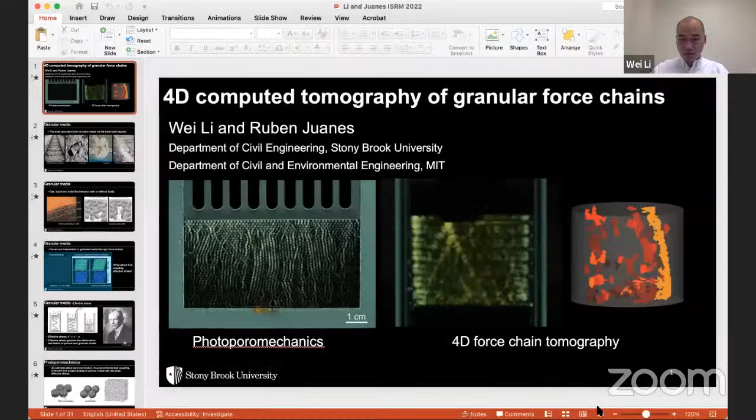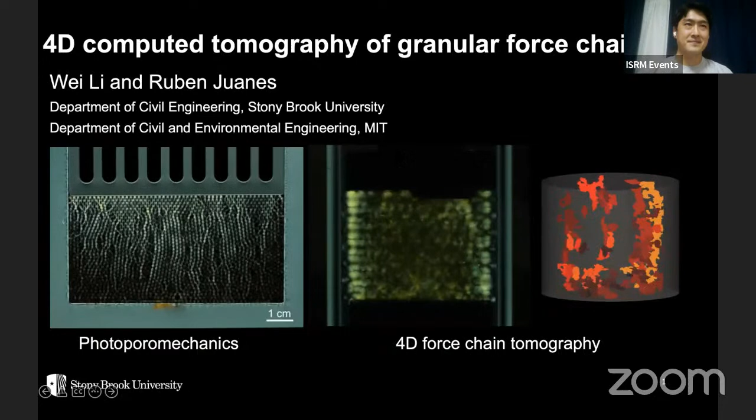Thank you. All right everyone, can you see my screen? Yes, I can see. Okay great, let's get started. Thank you, Ryota, for your kind introduction. Hello everyone, my name is Wei. I'm currently an assistant professor in the Department of Civil Engineering at Stony Brook University.

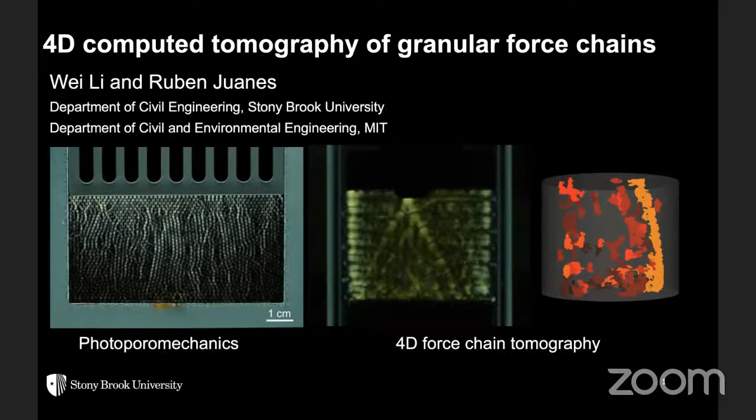In today's seminar I will present a new type of tomography called 4D computed tomography of granular force chains. This work is done in collaboration with Professor Ruben Juanes in the Department of Civil and Environmental Engineering at MIT. I will first introduce a new method called photoporomechanics that visualizes effective stress. This is a two-dimensional experimental method, and I will move on from 2D to 4D to visualize force chain evolution in three-dimensional granular media.

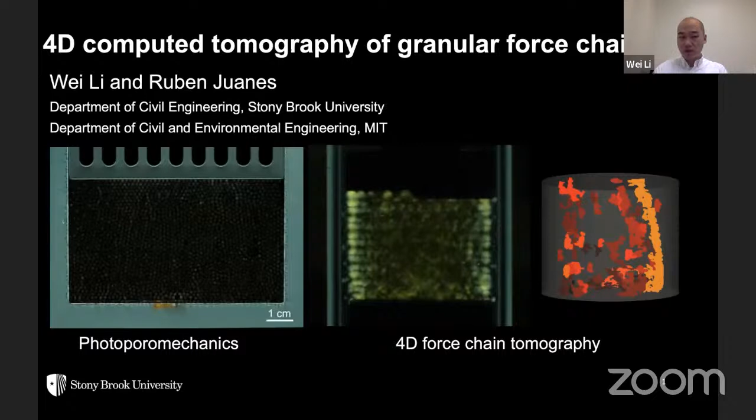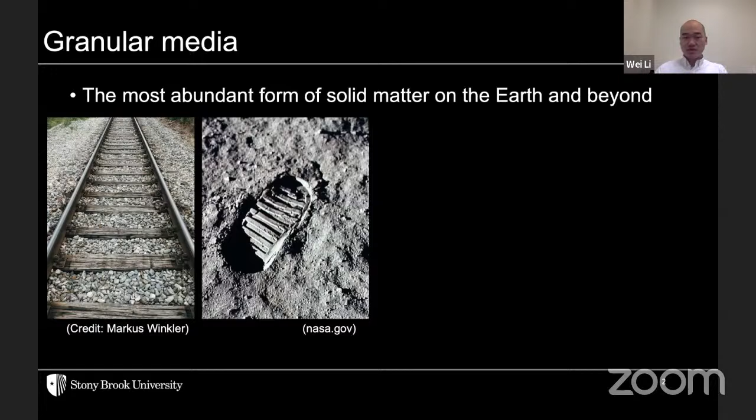So why do we study granular media? Granular media is the most abundant form of solid matter on Earth and beyond Earth. It supports our infrastructure, shown on the railway track, and it supports our space explorations, such as the first step on the moon. However, the failure of granular media could lead to devastating consequences, such as landslides and earthquakes.

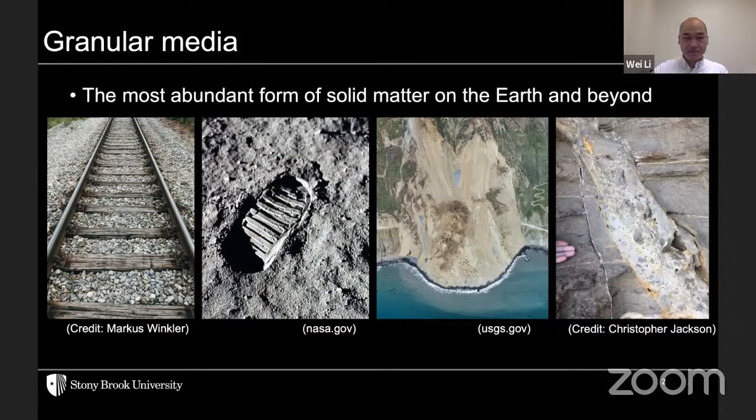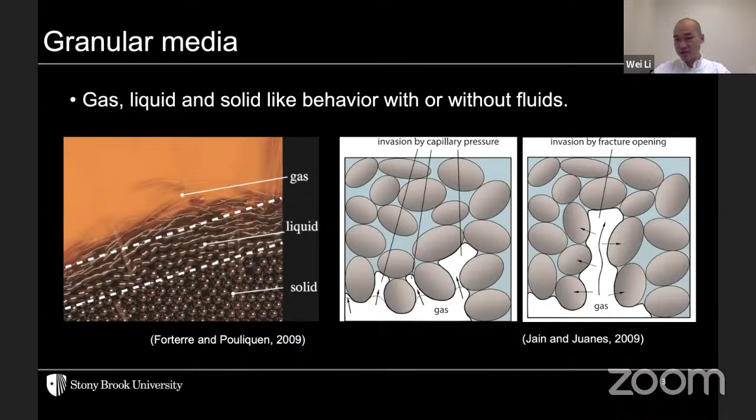The behavior of granular media is very complex. It could exhibit gas, liquid, and solid-like behavior when dry, and coupling with fluid, it will exhibit even more complex behavior, such as gas invasion and gas fracturing.

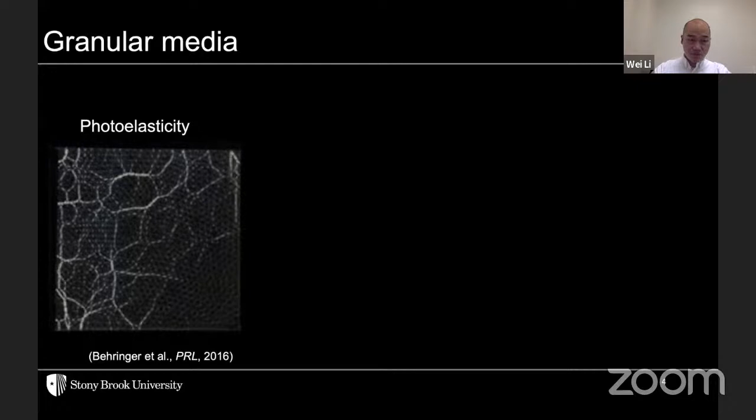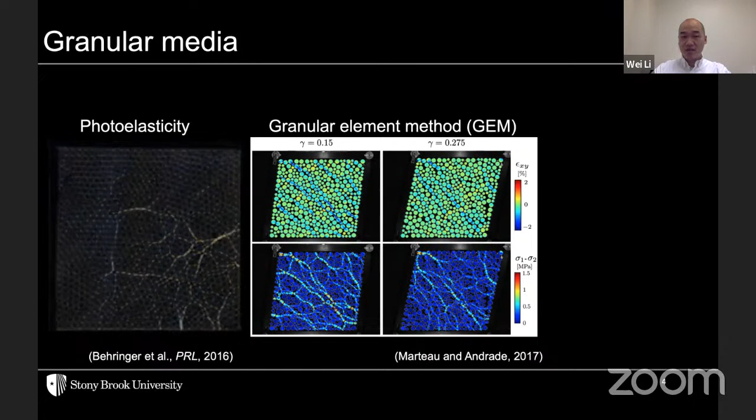Another type of study was done by Professor Jose Andrade's group at Caltech. They use particle tracking and DIC to visualize the deformation on each of these particles, and from the deformation they can calculate the interparticle forces. Their findings are similar: the forces are transmitted in granular media through force chains.

Well, powerful as this method can be, what about fluid coupling? More importantly, what about effective stress that governs the behavior of granular media when they are coupled with fluids? Can we simply put these methods underwater and visualize effective stress?

The answer is no, because effective stress is a very important concept that was introduced about a century ago by the father of soil mechanics, Karl Terzaghi. The concept is relatively simple. If you apply a certain load on soil, the soil will not deform immediately. But if you allow the pore fluid to drain, the pore pressure to dissipate, the soil will further deform.

From Terzaghi's point of view, effective stress is the total stress minus the pore pressure, because the pore pressure is supporting part of the load, right? And the effective stress governs the deformation and failure of porous media and granular media.

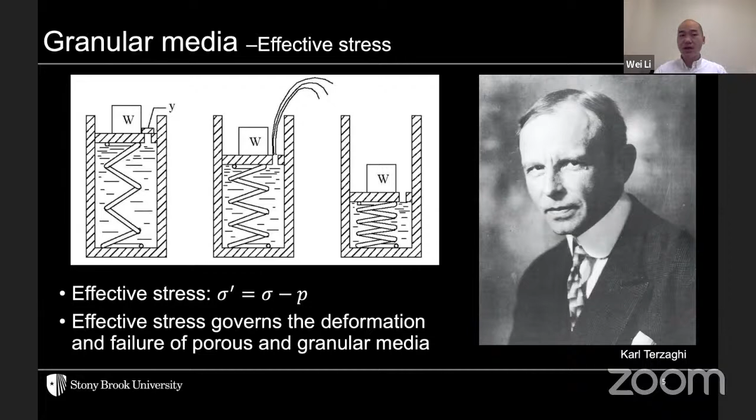Important as this concept is in the field of civil engineering and geomechanics, effective stress has never been directly visualized or measured. And this is what our new technique does. We call this new technique photoporomechanics.

The previous method, as I discussed, used disks. The pores among these disks are not connected, so they are not forming a proper analog of a porous media or granular media. So we have to use three-dimensional particles. These particles will allow pore connection and thus poromechanical coupling. Only with this proper analog can we study effective stress.

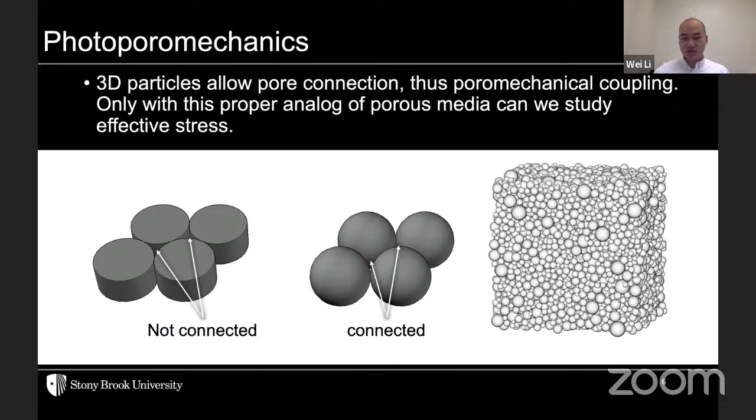So that's what we did. We make these photoelastic spheres and angular particles that are three-dimensional. So when we pack them, they will have pore connection. This angular particle we fabricated is called icosahedral. It's a three-dimensional shape that has more angularity for interparticle locking.

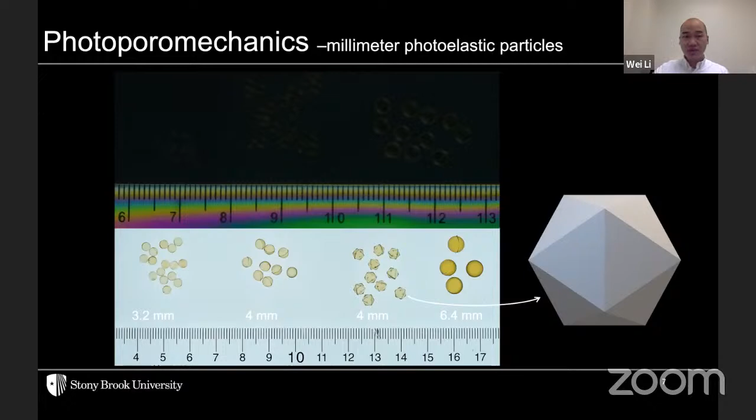These particles are photoelastic, and at the same time, they are residual stress-free. What is residual stress? If you remember what the ruler looks like under white light, this is what it looks like under cross-polarized light. You can see the color fringes. We don't want that. We want our particles to only show up color and brightness change when they are under stress. And we did that, because now you can barely see these particles.

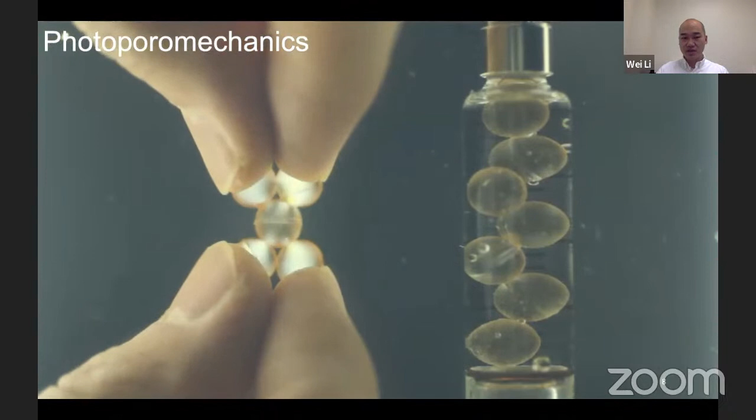Here is how the particles behave. This is my hand squeezing these particles. They light up when you squeeze. And if you squeeze them really hard, you can see the color fringes. These particles are also chemically compatible with many fluids such as oil, water, glycerol, and air. And even when there is multi-phase flow interfaces, it does not affect their behavior.

Besides playing with these particles, we conducted calibration tests. We load these particles in steps and record their reaction forces and the brightness change on these particles. After we associate this brightness with the forces on them, we can quantitatively analyze the local stresses on these particles.

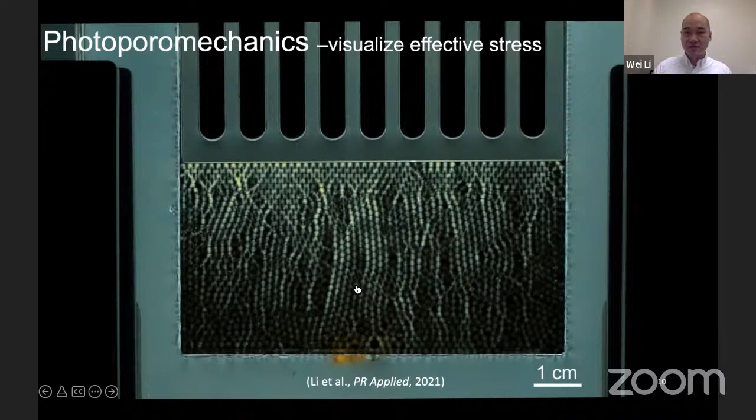So qualitatively, you can already see that this is consistent with the 1D consolidation theory. Now, here is a more quantitative study.

We take six snapshots during the experiment. We average the light intensity horizontally, so we have a vertical profile of the light intensity. If the light intensity is indeed indicating the effective stress, we should have a good match with the 1D consolidation model, which is shown in the dashed line. And here you can see that the experimental results match the model pretty well. So now we can confidently say that we are able to visualize and measure the effective stress for the first time in porous media.

Now, we immediately apply this method in the study of gas invasion in fluid-saturated granular media. When the particles are fully saturated, they could behave like a solid or a fluid. When they behave like a solid, the fluid has to permeate through the pores.

But when they behave like a fluid, they can just flow together with the pore fluid. So it is really hard to tell from traditional methods, but now with photoporomechanics, we can easily tell, right?

This is an experiment when we inject air into a fully saturated pack of photoelastic particles. As you can see at the tip of this fracture, the granular media behaves more like a solid where you can see effective stress. Behind the tip of the fracture, it behaves like a fluid where there's no effective stress.

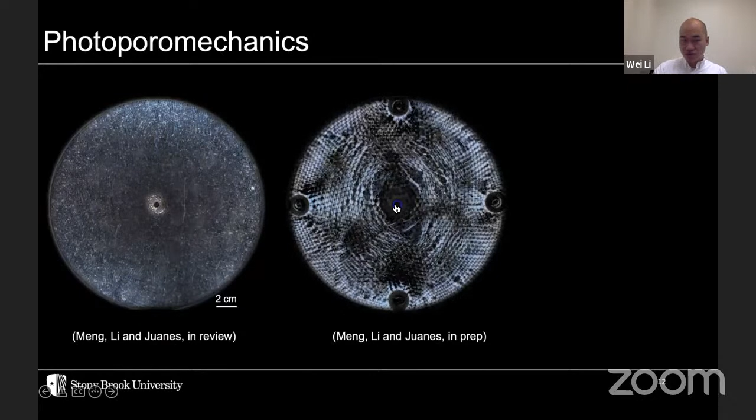You can see these force chains that are circular around the injection port, indicating that there is negative stress. Negative stress meaning tensile stress. So now I have presented a new technique that can help us visualize effective stress.

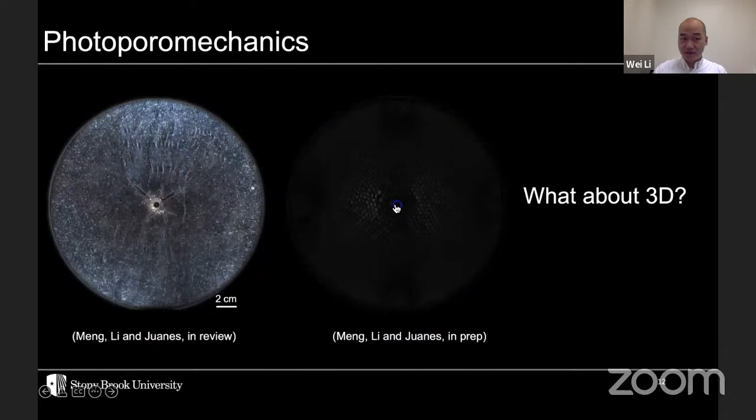But how about three-dimensional granular media? Well, there have been several studies. What they do is they use either index matching tomography or X-ray CT to reconstruct the deformation on each of these particles.

And then based on this deformation, they use force balance, contact models, and constitutive models altogether to calculate the interparticle force chains like this. This is how forces are transmitted through three-dimensional granular media.

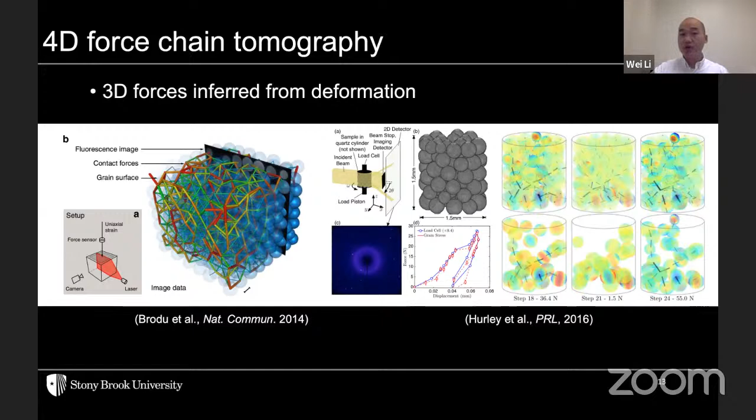Now we want to come up with a new method that does not need to assume a contact model, and it can handle particles with more angularity.

So we learned from tomography that we should use a penetrating wave to generate a 2D projection of a 3D object. For example, this is a first X-ray of a hand. And then when we rotate the object while we generate these 2D projections, we can reconstruct the three-dimensional model based on these 2D projections.

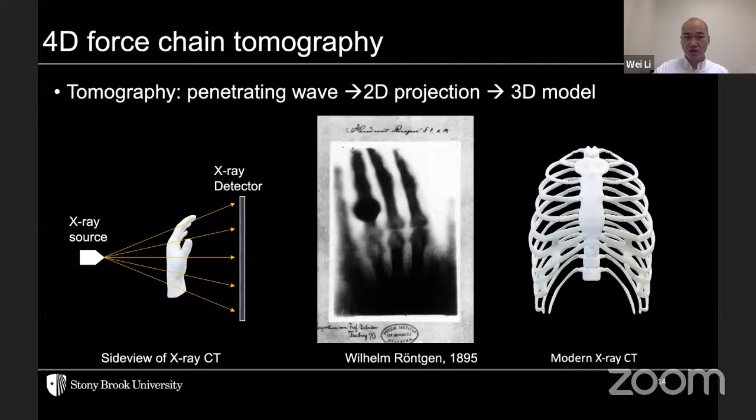So this is what we did with our new type of tomography. We want to integrate photoelasticity with tomography. However, one big obstacle is that these particles at the same time are lenses that cause refraction of the white light. We don't want that refraction, right? We want the white light to be the penetrating wave.

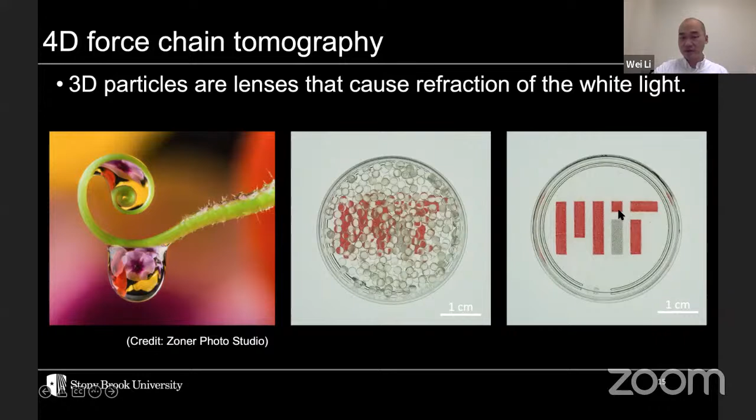So what we did is we made an index matching fluid for these particles. Now when we saturate these particles with this index matching fluid, you can see they no longer refract the light because it got canceled out. So now we can use white light as the penetrating wave.

Here is a schematic of the setup. White light generates through this light panel, and it penetrates through this index matching fluid tank and this three-dimensional pack of particles. And then we can generate these 2D projections.

And here is how the setup looks like. This is a setup to apply normal stress and rotary shear onto the three-dimensional pack of photoelastic particles. This is the index matching fluid tank. This is the rotation stage that rotates the pack.

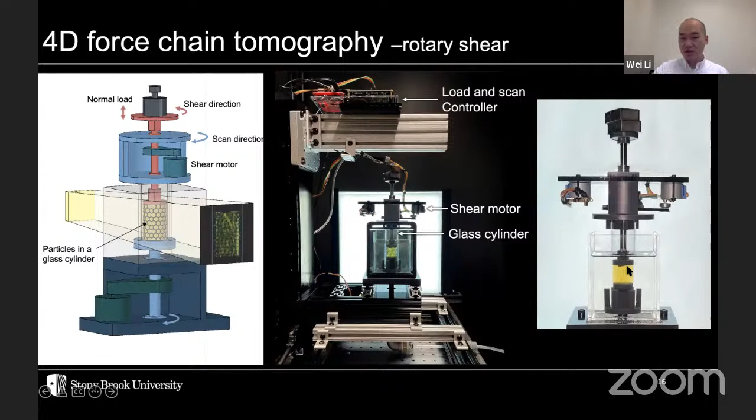And here is how it looks like under cross-polarized light. You can already see some filamentary patterns using this technique. Here's a close-up of the loading device that applies normal stress and shear stress onto the pack of photoelastic particles.

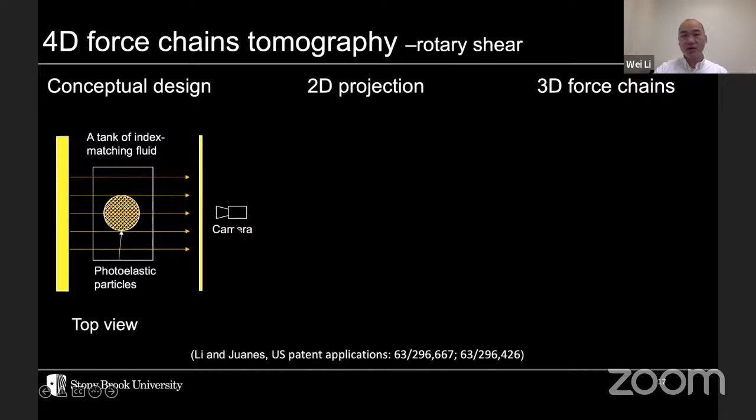And again, here's a conceptual design. White light penetrates through this index matching fluid tank and the three-dimensional pack and gets recorded by the camera. So here is the 2D projection, and this is a 360-degree rotation of the 2D projection.

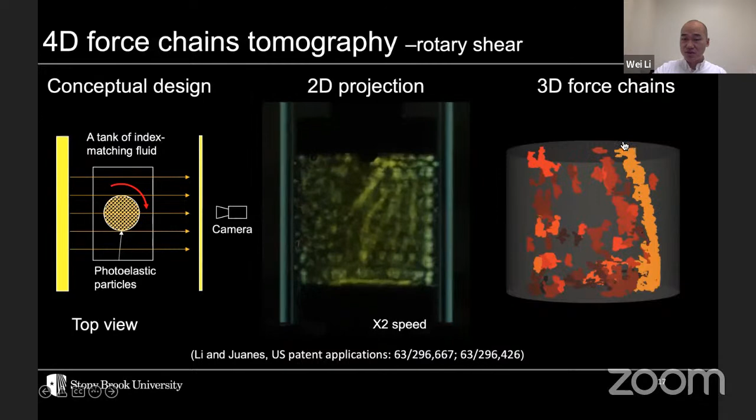As it rotates, we take pictures. In this 360 rotation, we take about 2,000 images to reconstruct the three-dimensional force network. Here is how it looks like, and this is the first time we see helical-shaped force chains in granular media.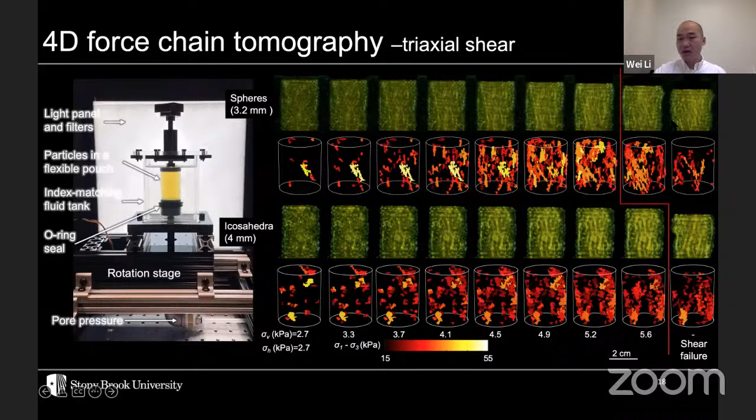Obviously, particles with more angularity fail later than particles with less angularity, such as spherical particles.

We also did a quantitative study trying to see how these particles relate in orientation, length, and stress. This is a two-dimensional histogram of their length, stress, and dip. The dip, with 90 degrees meaning vertical, and the bottom axes show length and stress.

As you can see, when we increase the vertical stress, we see more and more force chains with a 90-degree dip, meaning they are vertical. We also see more vertical and long force chains form as we increase the vertical stress. Right before failure, the force chains start to shift from vertical to other degrees, meaning they are buckling.

And after they fail, the force chain starts to disappear.

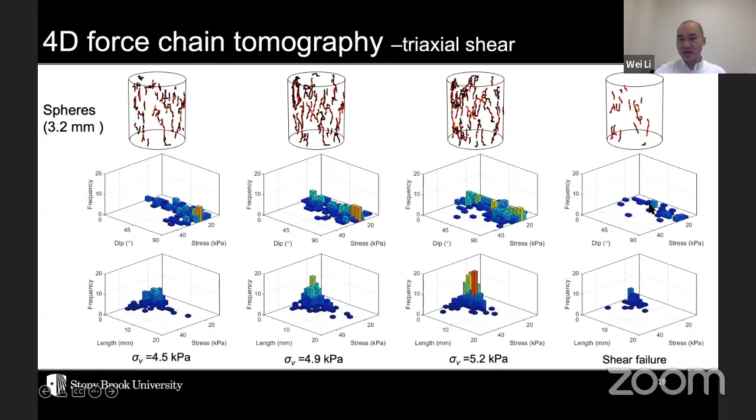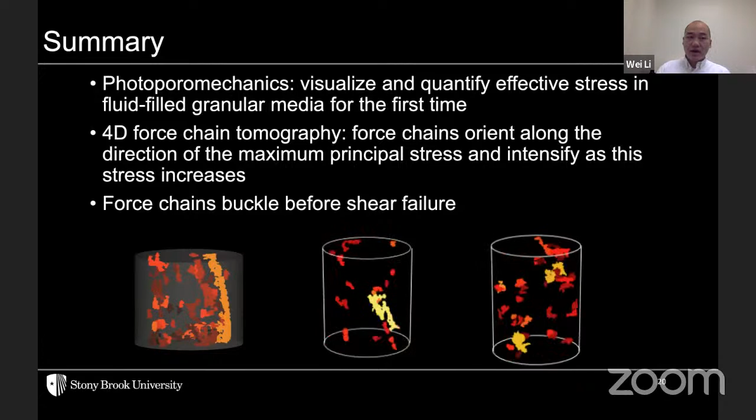So with this technology, I would like to summarize our study here. We developed a new technique called photoporomechanics to visualize and quantify effective stress in fluid-filled granular media. We developed this 4D force chain tomography and found that force chains orient along the direction of the maximum principal stress and intensify as stress increases. The force chains will buckle before shear failure.

I would like to stop here, and here is a reference for our previous study on photoporomechanics. This study was sponsored by NSF, and we are grateful for their support.

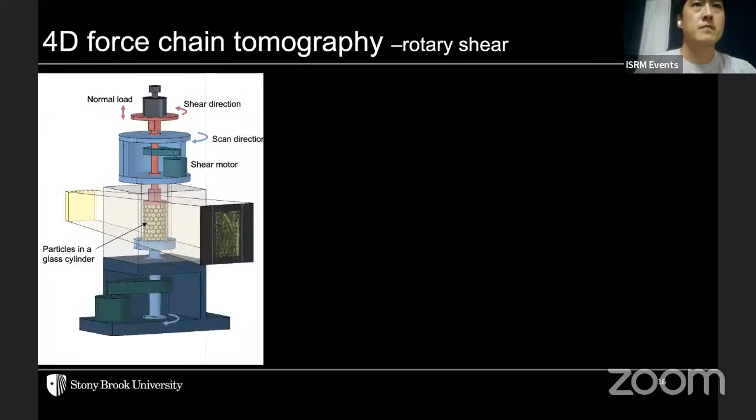Okay, can I ask a question? Would you show slide 11? Okay, slide 11. Yeah, yeah.

I couldn't catch how you convert, how you get the effective stress value from...

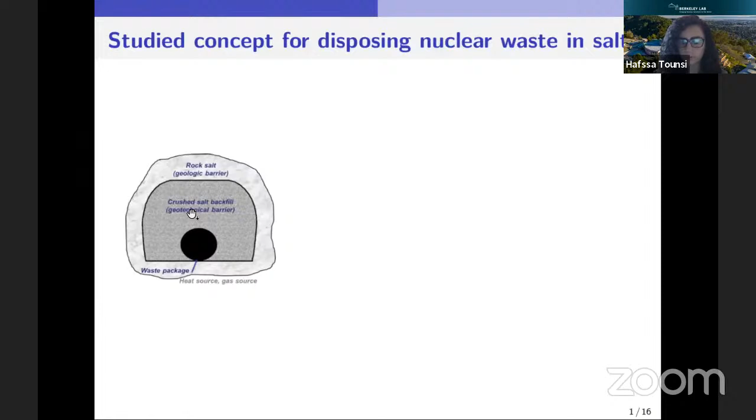We have identified several thermal, hydraulic, and mechanical processes associated with this disposal scenario. Among them, in the short term, we have the development of a damaged zone around the newly excavated drifts, the compaction of the backfill, the healing of microfractures in the damaged areas, and finally the increase of temperature in the repository and the resulting pore pressure buildup.

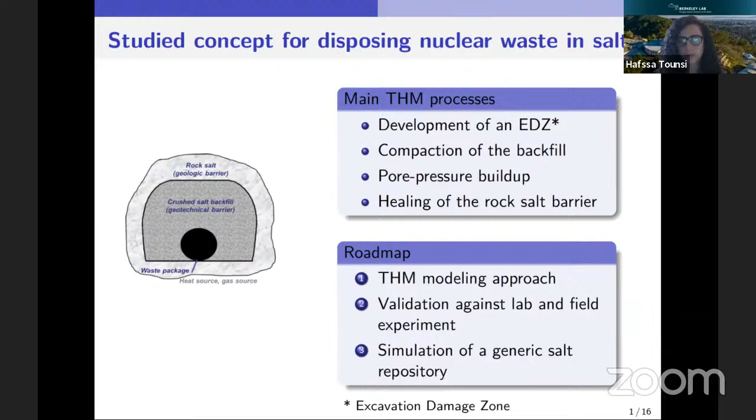To investigate these processes and their impacts in the short and long term on the integrity of the geotechnical and geological barriers, we use a macroscopic numerical modeling approach, which I will briefly present. This approach has been validated against different lab and field experiments in order to use it confidently for the simulation or prediction of the behavior of the salt repository for high heat emitting nuclear wastes.

In all the simulations I will present today, the TOUGH-FLAC simulator was used. It links TOUGH, Berkeley Lab's in-house simulator for multi-phase flow and heat transport, with the geomechanical code FLAC3D.

The energy and mass balance equations are first solved in TOUGH, and then the mechanical problem is solved in FLAC3D using the newly computed values of the pressures and saturations of the different phases in the pore space, and temperature.

The mechanical calculation allows us to update the grid because we are in the large deformation framework, in order to accommodate the large deformations of the backfill during reconsolidation.

The grid is updated using the newly computed values of the strain tensor, and the flow parameters are also updated, such as the porosities and permeabilities.

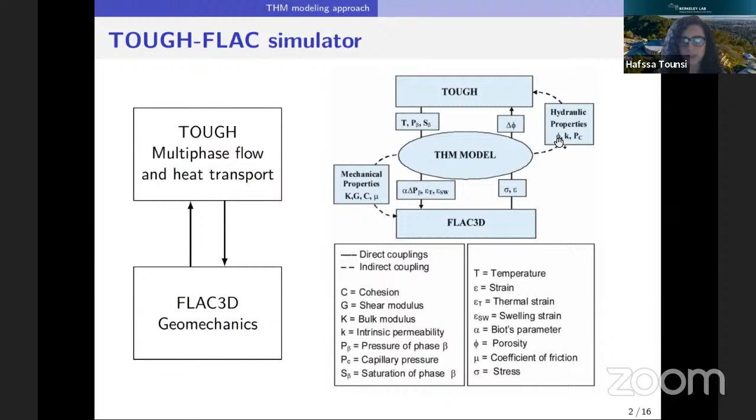To describe the mechanical behavior of rock salt, we use the Lux-Wolters model. It has been developed by our collaborators from Clausthal University of Technology.

In this model, the total strain rate tensor is decomposed into an elastic component, and a viscoplastic component that includes transient and steady state creep, whose evolution laws are a function of deviatoric stress and temperature.

The third component is the shear-induced damage that takes place when the shear or von Mises stress exceeds the shear strength, which is a function of the minimum principal stress and the Lode angle.

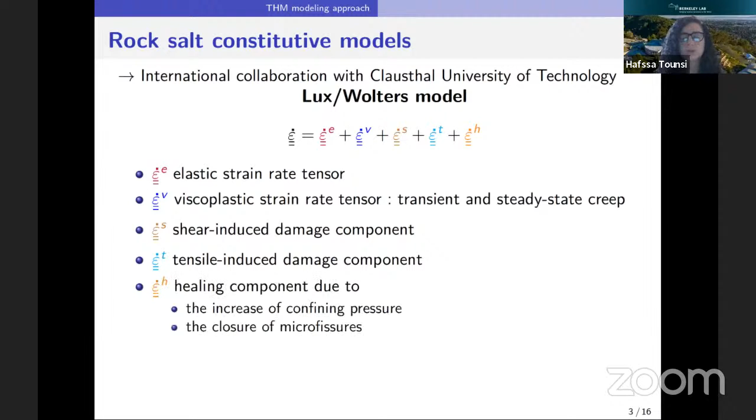The appearance of tensile stresses also leads to additional damage. The last component is healing, due to the increase of confining pressure or the closure of microfissures.

When thermomechanical damage takes place and the volumetric strain exceeds a dilatancy threshold, the preformed microfractures start to coalesce, leading to an increase of permeability.

We take into account this increase of permeability. It is also a function of the effective stress perpendicular to the direction of the microfissure.

Permeability can also increase due to hydraulically induced damage, which happens when the fluid pressure exceeds the minimum principal stress, leading to an infiltration of the saturating fluid along the newly opened grain boundaries.

We also consider the increase of the Biot coefficient with damage, and we use two empirical expressions to describe the variation of the thermal conductivity and heat capacity of rock salt with temperature.

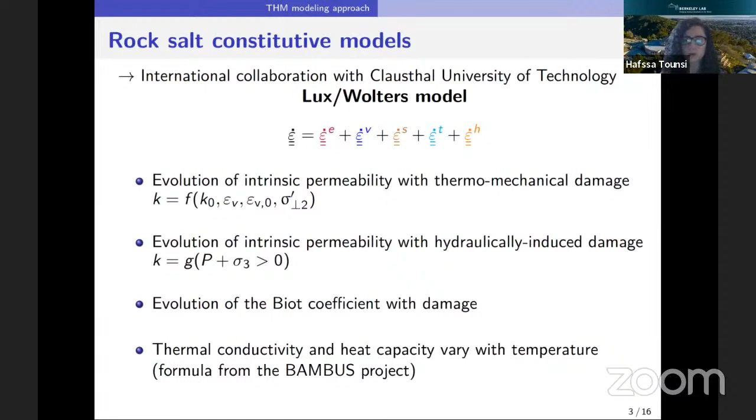For the backfill material, crushed salt, we use a modified version of the CWIPP model. In this version, the total strain rate tensor is decomposed into an elastic component.

The drained elastic moduli now evolve with crushed salt density. So when crushed salt density increases, the bulk modulus increases and the Biot coefficient decreases.

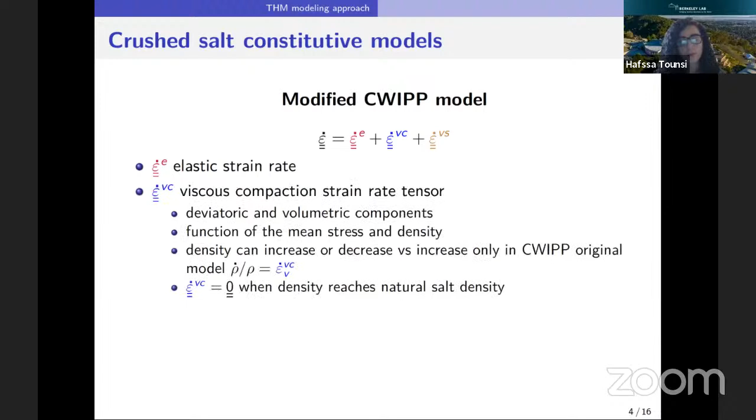We have a second component, the viscous compaction strain rate tensor. It has a deviatoric and a volumetric component, and depends on the mean stress and density. It becomes equal to zero when the density of crushed salt reaches the density of natural salt.

The last component is the viscous one. It is purely deviatoric, depends only on the deviatoric stress and temperature, and does not get cancelled when the backfill is fully reconsolidated.

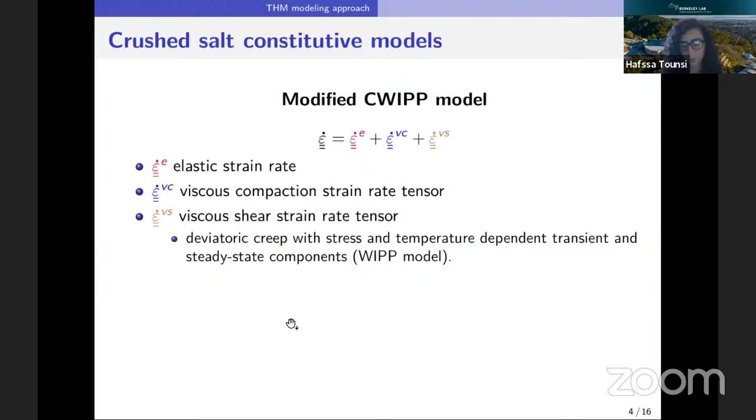It has transient and steady state components, which are expressed in a similar way to the WIPP model, also implemented in FLAC3D.

Permeability and thermal conductivity of crushed salt are assumed to vary with the porosity. So when the porosity of crushed salt decreases, its permeability decreases as well.

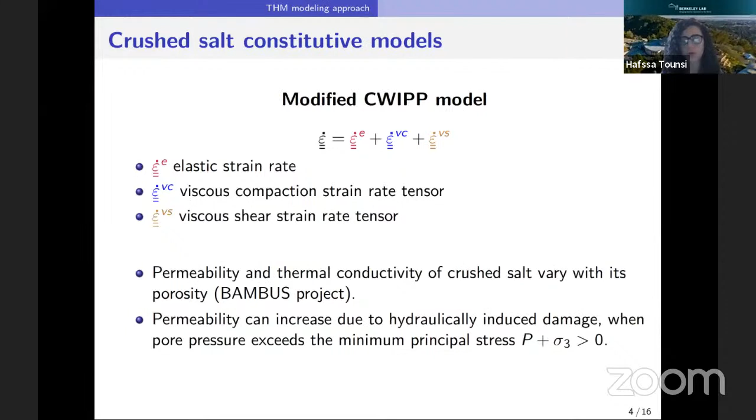But it can increase again in case we have hydraulically induced damage, when pore pressure exceeds the minimum principal stress, like for rock salt.

As I said in the beginning, this model has been validated against different lab and field experiments. Today I have chosen to show the example of an experiment that was conducted in the 1980s by Sandia National Laboratories, but it has never been properly modeled.

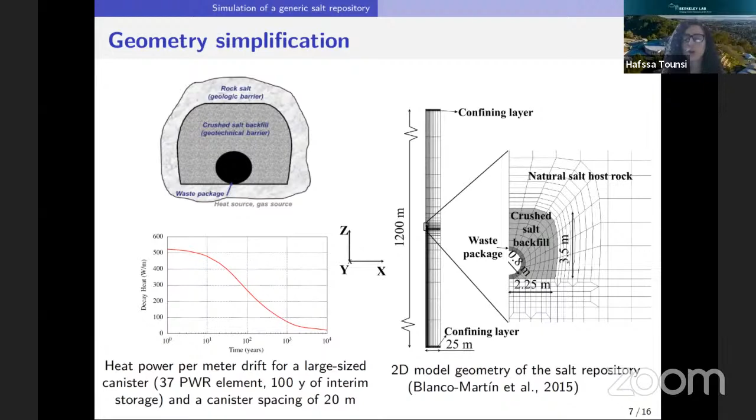So we simulate first the excavation of the drift, the emplacement of the waste package, and the backfilling in order to generate the initial pore pressure and stress fields. In the next slides, I'll present the results for the post-backfilling stage.

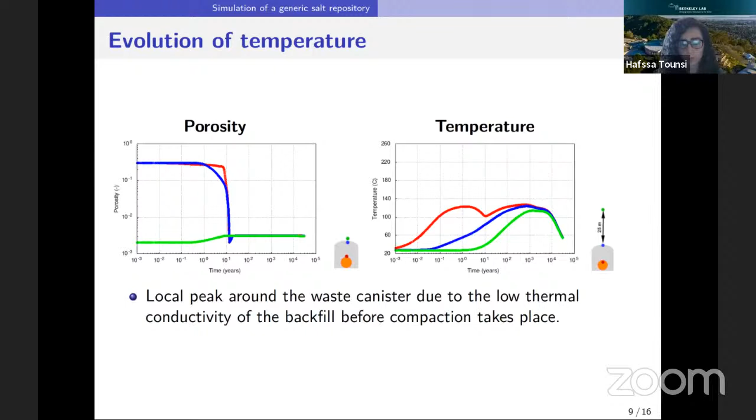As the backfill reconsolidates, the elastic moduli of crushed salt tend toward the elastic parameters of rock salt, and the stress state, which is initially equal to 0 in the drift, increases and becomes equal to the initial undisturbed isotropic stress state in the host rock.

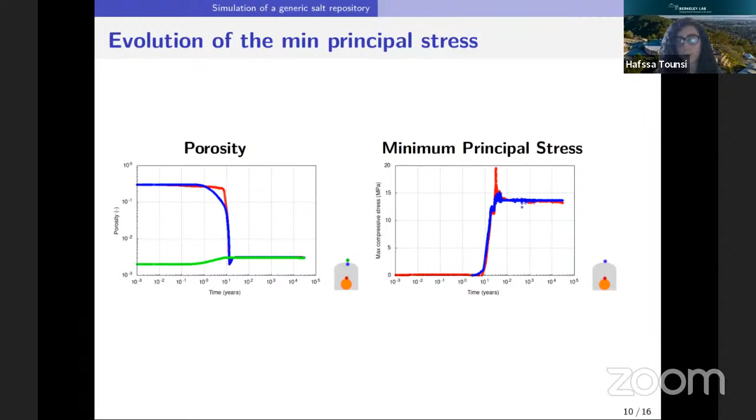Now I'm showing the distribution of shear dilatancy around the drift in order to get an idea about the extent of the excavation damage zone around the drift.

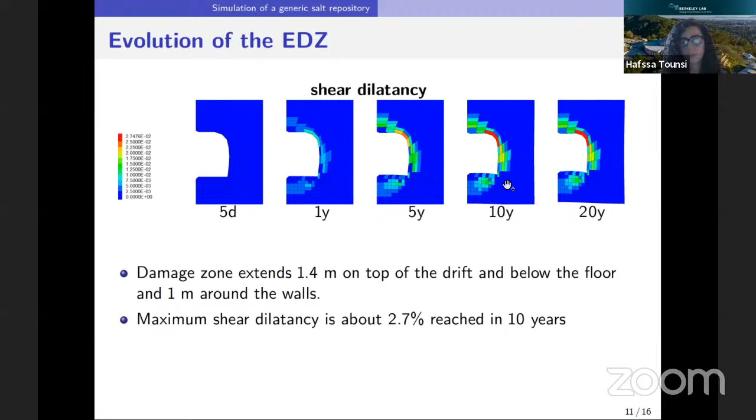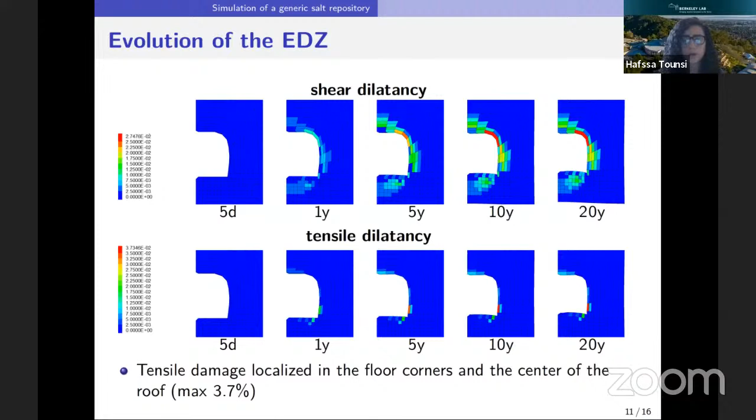As you can see, 10 years after the backfilling of the drift, the shear dilatancy reaches its peak, its maximum values, around 2.7% in the corner. The damage zone extends 1.4 meters on top of the drift and below the floor, and 1 meter around the side walls. We also have some tensile dilatancy, but it's very localized in the floor corners and the center of the roof, probably due to geometrical considerations.

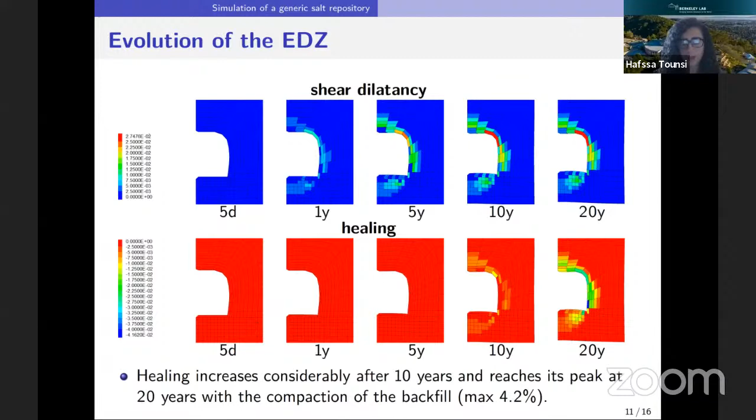Now the distribution of healing. As you can see, at 10 years, the healing becomes significant, which explains why the shear and tensile dilatancy reach their maximum at this date. But 10 years later, the excavation damage zone becomes fully healed, and this quick healing is accelerated by the quick reconsolidation of the drift. So the main outcome from these dilatancy maps is that the creep and dilatancy of natural salts trigger and accelerate the reconsolidation of crushed salt, which in return contributes to the acceleration of host rock healing.

The hydromechanical coupling in the EDZ, or the excavation damage zone, is very strong. Those maps show the evolution of the Biot coefficients in the EDZ. As you can see, at 10 years, when the dilatancy is maximum, the Biot coefficient can even reach the value of 1 in the corners and near the side walls.

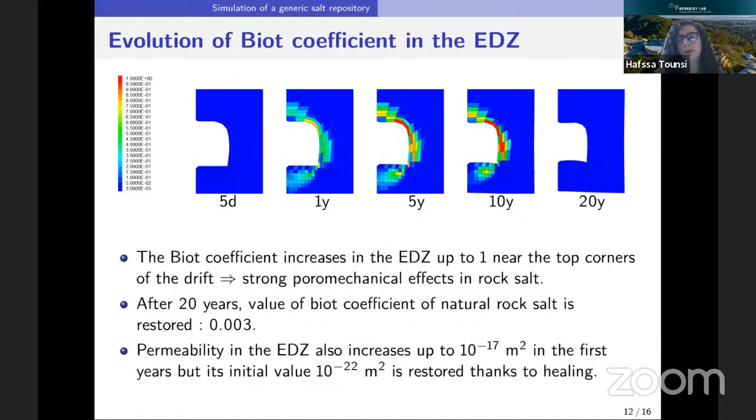But thanks to healing, its initial low value is restored 10 years later. The permeability in the EDZ also increases up to 10 to the power of -17 in the first years, but its initial value is restored as well, thanks to healing.

So as I said in the first slides, the shear and tensile dilatancy are not the only mechanisms responsible for the increase of permeability. We also have the hydraulically induced damage. To investigate this process, let's have a look at the pore pressure and liquid saturation evolution in three locations.

In the host rock, the green point, the pore pressure is initially equal to the hydrostatic pressure, and in the drift it is equal to the atmospheric pressure. Since the host rock is fully saturated, thermal pressurization is significant and starts to increase first due to thermal pressurization. But as the backfill reconsolidates, liquid saturation inside the drift increases, and the thermal pressurization becomes significant there too, so pore pressure increases as well.

In the three locations, the pore pressure exceeds the lithostatic stress level, indicated with the purple line, and this induces an increase of permeability and a decrease of pore pressure until it stabilizes around the lithostatic stress level. And when the temperature starts to go down, the pore pressure starts to go down as well.

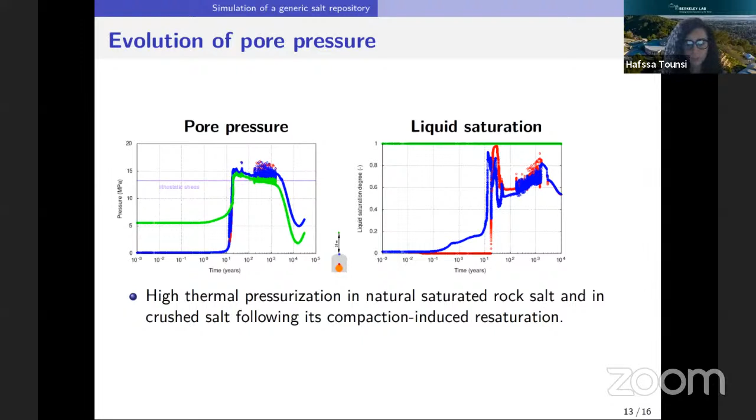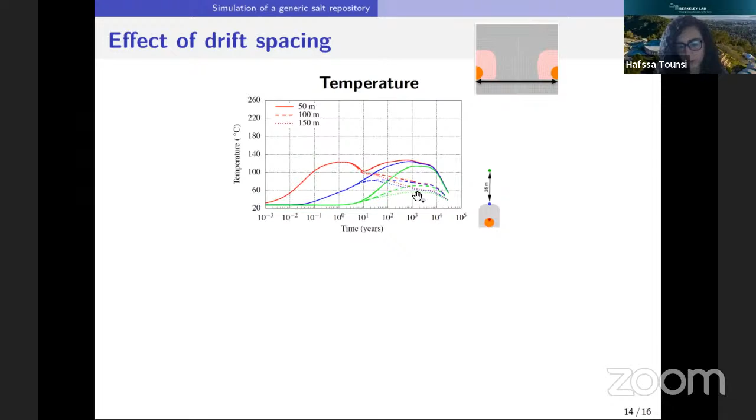In order to investigate whether we can alleviate this strong thermal pressurization in the repository, we conducted another simulation where the spacing between the emplacement drifts has been doubled. This figure shows the old results of temperature and the new ones represented with dashed lines. As you can see, the long-term peak of temperature significantly decreases when the spacing was doubled.

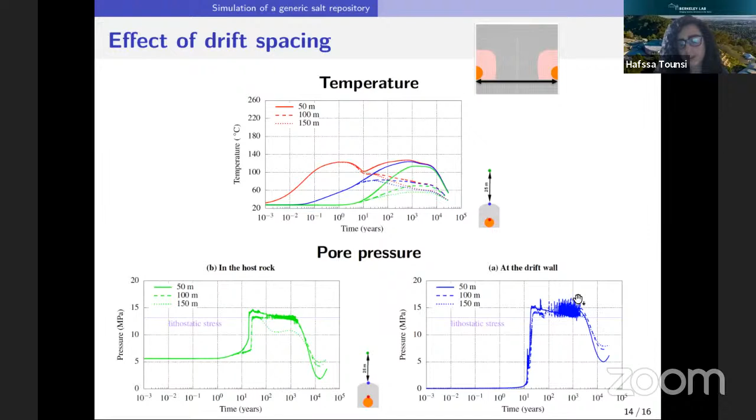But at the drift wall, the pore pressure is still exceeding the lithostatic stress level, even when the spacing was doubled. So to sum up, we've seen that salt repositories behave in a highly THM coupled manner. The simulations have shown that the high temperature changes and quicker consolidation of the backfill induce a strong thermal pressurization that may not be avoided even with a large distance between individual waste packages and emplacement drifts.

However, there are still some uncertainties related to crushed salt compaction rates. There is some recent experimental data on the compaction rate of crushed salt suggesting that this compaction rate will decrease with the decrease of porosity, resulting in a longer or slower reconsolidation of the backfill. Also, the deviatoric stress in the repository in the long term is lower than 1 megapascal, and most creep data available in the literature is conducted in a larger deviatoric stress range.

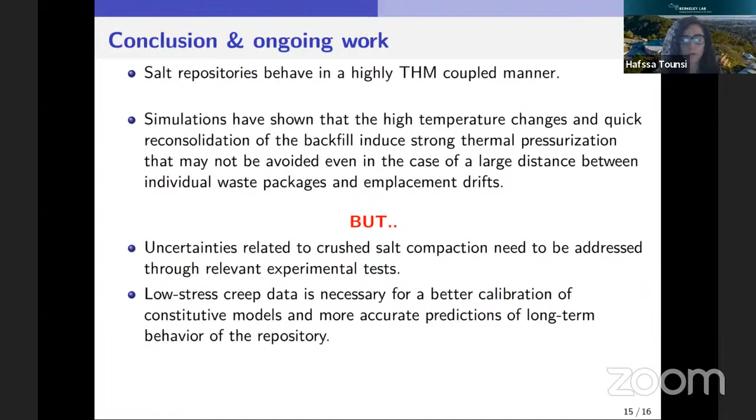So low stress creep data is needed for a better calibration of constitutive models and a more accurate prediction of the long-term behavior of the repository. So that's it. Thanks for your attention, and I would be happy to take your questions.

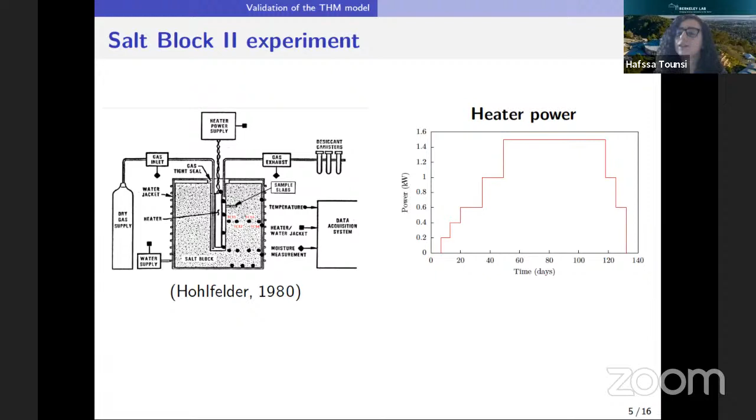Okay. Yeah, it's because for constructing this curve of heater power, this is a schematic curve. We don't have the exact measurements of the heater power with time. It's a very old experiment, so we have events. We know that after 10 days the heater power was increased, but this is a modeling approximation. It's not the real curve showing the exact heater power value with time. We only have dates when the heater power was increased or decreased, but we don't have the exact values. So it's maybe due to that.

Okay, thank you. So, are there questions? No? Okay, I have here another question.

About the effect that the slow compression of the crushed salt backfill will have on the repository behavior. Yes.

So the slow compaction of the backfill would have an advantage and a disadvantage. The disadvantage would be the slow reconsolidation of the backfill, meaning the waste package would be in contact with a geotechnical barrier that is not completely impermeable for probably thousands of years. The advantage would be the alleviation of the strong thermal pressurization, because the reconsolidation will be very slow and the increase of liquid saturation inside the drift will be very gradual. So we would avoid the problem of thermal pressurization in the repository.

Thank you, Hafsa. So, do we have another question from the public? No question. Okay, I have a last one.